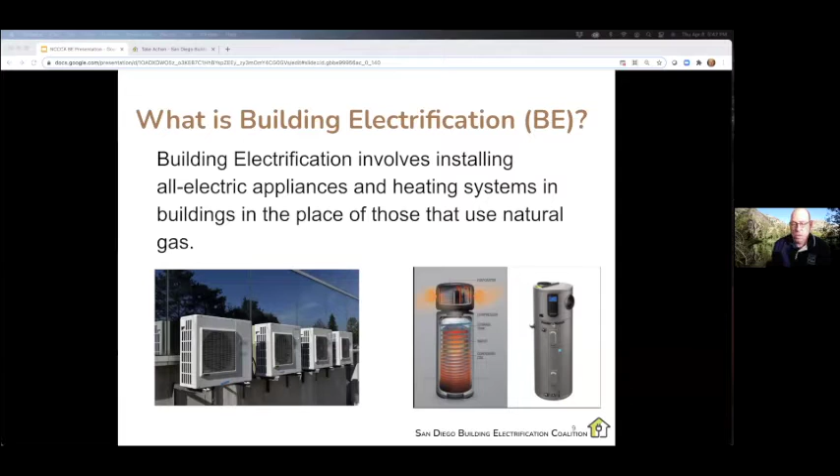I mean, sort of. So the transition is going to require a lot of things, including changes to our building codes so that this transition that needs to happen happens quicker. It applies to all kinds of buildings, so every building can be electrified. And as we've been saying earlier, just want to clarify because a lot of people ask us this, we're just currently advocating for no new gas hookups. So any buildings built from now on, we're hoping to not have any new hookups for gas lines.

So why is it important to electrify our buildings? Well, there's some serious climate benefits and reductions in greenhouse gases by eliminating burning natural gas in buildings and replacing it with energy from renewable resources. Also, local, regional, and state climate targets cannot be met unless we electrify our buildings, and that's really important. And we're going to talk about the many adverse health effects with indoor air pollution that's generated when using natural gas in buildings, mostly residential, and we'll get more to that in this presentation.

There's also lower costs associated with operating and also building all-electric buildings. Also, all-electric appliances are much more efficient than natural gas ones, and again, we'll go into that. And finally, there are some serious public safety risks associated with the extraction, transportation, storage, and delivery of natural gas. A couple examples. We live in earthquake country, so when you have an earthquake, there's a high potential for these gas lines to rupture and have post-earthquake fires, which has happened in the past.

And then I'm not sure if people are familiar with the Aliso Canyon gas leak, where there's this massive storage facility in Aliso Canyon that was leaking tons and tons of natural gas into the atmosphere. That was really bad for the residents. They had to be evacuated, and also it compounded the climate change issues with natural gas, the millions of tons going into the atmosphere. So when we don't need natural gas, these sort of things will stop happening.

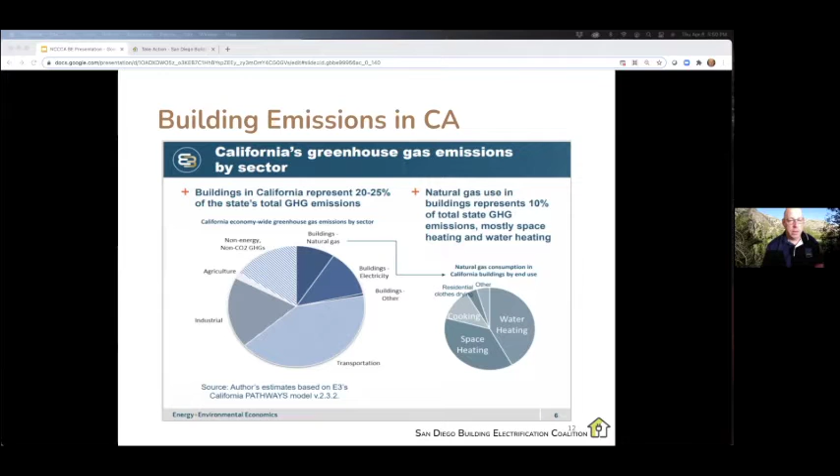There's lots of advocacy trying to influence the current building code cycle, the 2022 cycle, to make that an all-electric code. And then also there's utilities like Sacramento's SMUD that are really pro electrification of buildings, and they are promoting pilot programs and incentives to electrify buildings.

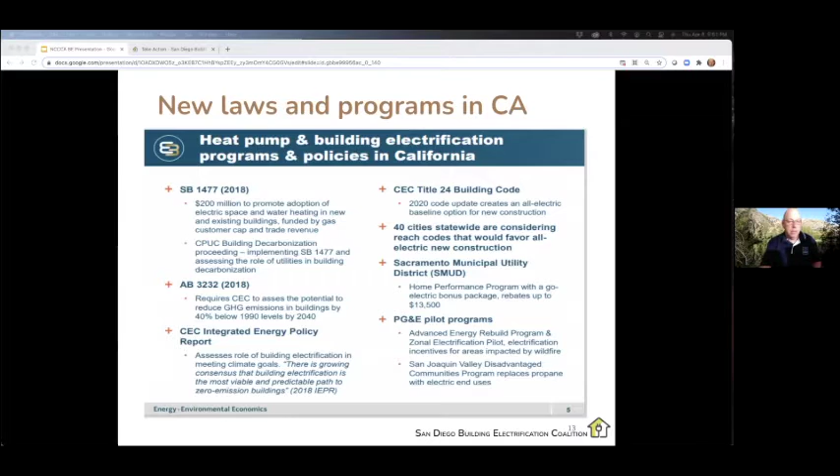There are currently over 40 municipalities that have already adopted some sort of building electrification code, whether it's an all-out ban or something close to it with a few exceptions. So Berkeley is an example of an all-out ban. All single-family, high-rise, multifamily, and non-residential new construction is required to be all electric. Then you've got cities like Brisbane and Burlingame, which are all electric. However, they have some exceptions for cooktops, or if you're life science or restaurants, those businesses are not affected at this time.

So, like I said, there's over 40 of these. So there's lots and lots of momentum going towards electrification. So now I'm going to expand a little bit on why all electric buildings have lower costs.

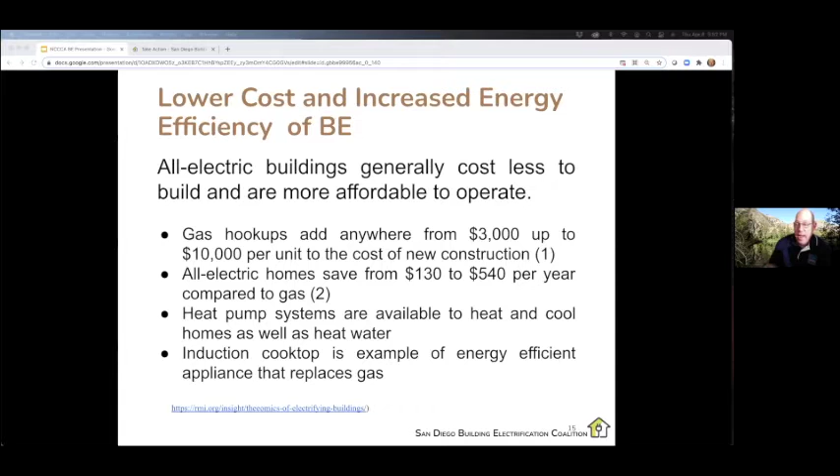So first costs for new constructions: buildings can cost anywhere from $3,000 to $10,000 less per unit due to not having to install that infrastructure for gas. Operational costs also are considerably lower. For instance, utility bills can be anywhere from $100 to $500 lower compared to using appliances that use gas. And then this technology is fully mature and readily available. Heat pump systems for both water heating and space heating exist, and they're comparable in cost. And Carl's going to really dive into that later on, so he can really explain why that is.

Again, a little more detail. The reason why new construction costs less is that you don't have to install pipes from the main into your building and throughout the building. It just doesn't have to happen, so it's much cheaper. And also, heat pump systems are anywhere from 3 to 5 times more efficient than electric resistance. And then when you pair this with rooftop solar and storage, the cost will fall even further because your cost for those electrons is less, and also the emissions are less because those are all coming from renewable sources. Again, we'll elaborate on that more.

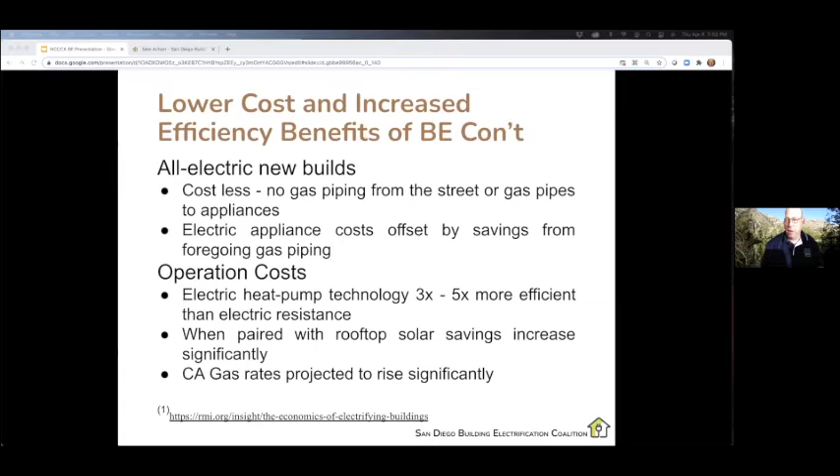And then what's going to happen is that as more and more people transition to electrifying their buildings, the infrastructure for gas needs to be maintained and upgraded. And so there'll be fewer and fewer ratepayers that rely on gas, and so their costs are going to go up. So it definitely behooves the average person to electrify soon, because that is a reality that's going to happen. And lastly, California is not quite as green as we think.

There's a lot of things that California is leading on. But for example, the state of California continues to issue fracking permits, even though it touts its emission targets and so forth. They're still issuing rebates for gas water heaters, which will not help them reach these targets. So they're kind of fighting each other on that.

And then lastly, like I said, there's lots of advocacy for all electric building codes in the Title 24 update cycle. However, from what we're hearing, that's probably not going to happen. What we're truly hoping is that they mandate either heat pump water heaters or heat pumps for space heating. But we'll wait and see. But there's lots and lots of people trying to make that happen.

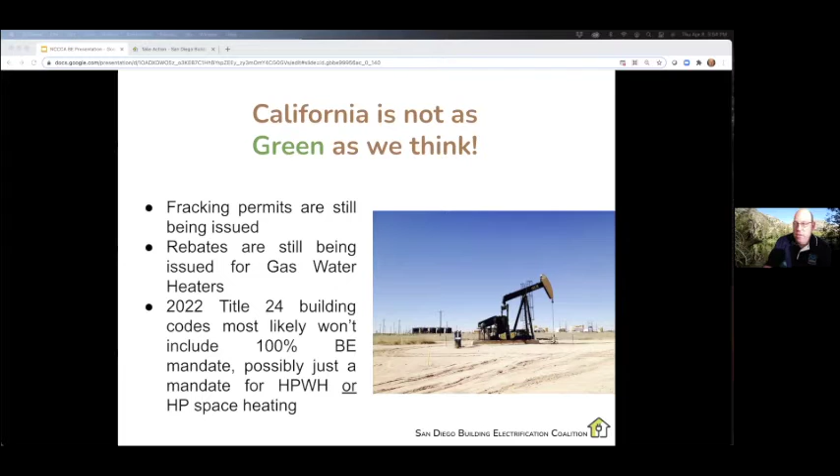So because of this, we potentially may not have an all electric building code until 2025, which unfortunately may be too late. So this is why we need to advocate for building electrification at every level now. We can't wait for the state to do the right thing. We need to mandate it here locally and start that transition as soon as possible. So like I showed you, it's already happening. So that's what we're trying to do at the SDBEC, really trying to get the localities to consider all electric codes. And there's definitely cities around San Diego County that are doing that. So that's great. So that's what I have for BE.

I'm going to now start transitioning into the adverse health effects of indoor air pollution, another really good reason why we need to electrify our buildings. So in the spring of 2020, 2 new reports were released. They are both studies researching the health effects of gas in built spaces. The first report is a meta-study out of UCLA Fielding School of Public Health, and examined both indoor and outdoor air pollution in California caused by residential gas appliances, including furnaces, water heaters, and stoves.

The second one was also a study about health and gas, but this time it was more focused on cooking. Both those studies provide tangible, shareable information complete with citations, many of which are hyperlinked from the report. We go into some key takeaways here about the toxins that they tracked and their effect on health. But let's first ask a question. What percentage of households in California have at least one gas appliance? Is it 37? Is it 68? 90%? 68.

90. It's kind of scary. 90%. Yeah, so that means that California and San Diego have a lot of work ahead of us to decarbonize our homes. So that's phase 2: what do we do with the existing building stock?

So you probably remember being told that natural gas is clean to burn with no emissions to consider. That simply isn't the case, and no one in the industry has ever found that to be true. That's why there's mandatory venting for gas appliances; it's the norm, it's the law. But vents only work if we use them and operate them. So if we forget to turn them on, those toxins potentially can hurt you. And less than 35% of Californians turn on the ventilation hoods when they operate their stoves. And in some cases, there's no hood present, so that's not even an option.

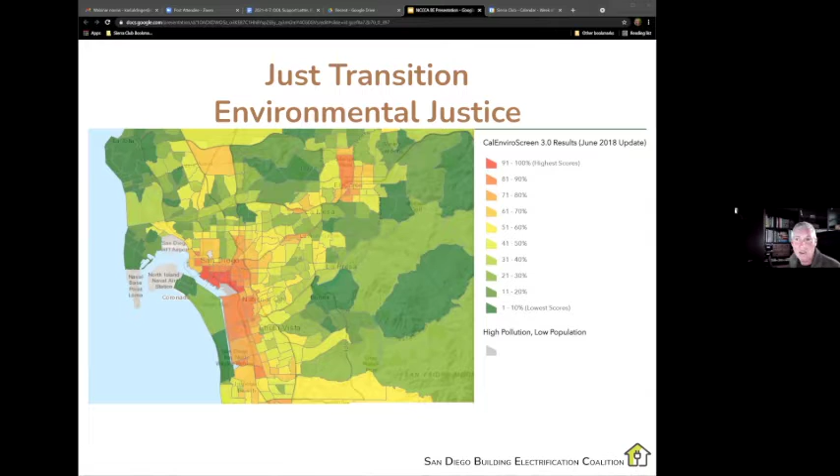So one important step in moving forward with building electrification is to ensure that we address the communities that need to have their air cleaned up the most. Often when we're doing this work, we remind people those are the folks that should be addressed first. Whether that means incentive programs or subsidies, there's got to be ways to help these communities that have the worst air quality, not just in San Diego, but we know San Diego has some of the worst air quality in the country. So there's a lot of work to do. We also have EJ communities in North County San Diego, in Oceanside, Vista, San Marcos, and Escondido.

We talked earlier about gas cooking and the importance of ventilation. One factor for people who rent apartments or live in smaller living spaces is that the toxins in their homes are more concentrated relative to that smaller space. So gas combustion toxins in those small spaces are worse for a family's health.

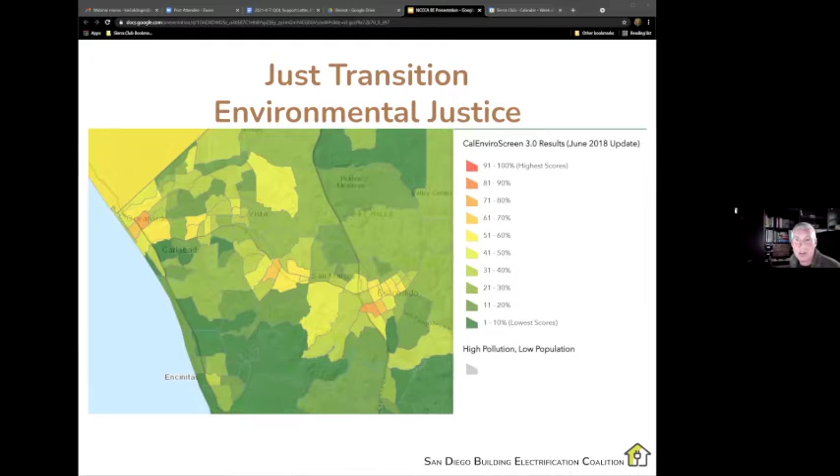I want to talk now about the workforce, because going into this campaign for building electrification, we knew that people's jobs would be affected. I work with IBEW and other labor organizations and policy folks in my climate and justice work in the county. So full disclosure, I really appreciate that we're all part of this community together. I want you to imagine picking up the newspaper one day, or reading the news on a website, and realizing that not only the company you work for or the plant you work in, but your whole industry is about to shrink, maybe out of existence.

I'm going to read you a quote.

"We have the Diablo Canyon nuclear plant. It's right there on a fault line. There's a tremendous amount of concern about that. There's no way, with what we know today, that we would build that plant as we built it. And people are rightly concerned about it. You're in a state where you have three faults that are well overdue for major seismic activity, for a major earthquake. So this is an obvious and pointed concern."

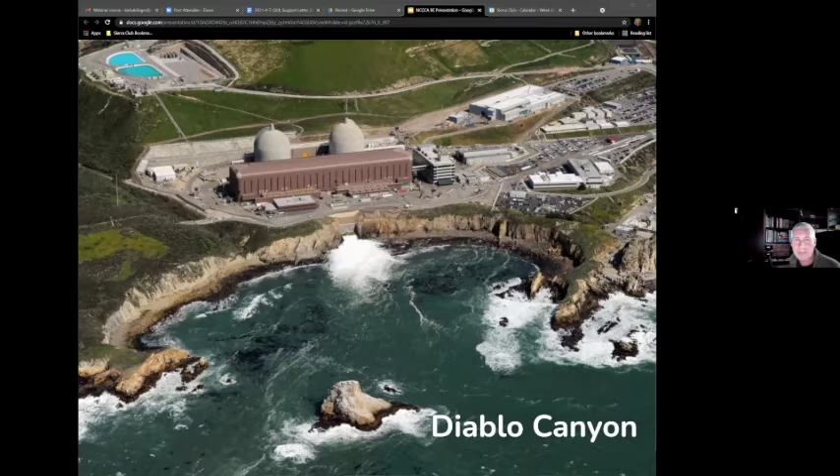The International Brotherhood of Electrical Workers, the IBEW Local 1245, union workers, they resisted the plant's closure. They wanted to keep their jobs, many of which were very specific to the work that they did, but that wouldn't be available locally if this plant were to shut down. You don't get another job at a nuclear plant in San Luis Obispo when Diablo Canyon shuts down. And in fact, you don't get another job at another nuclear plant anywhere in the state of California, because this is the last one that's operating.

So they appealed to state energy regulators. They appealed to the public, and they appealed to state legislators. And this is a photo of the IBEW members and supporters who traveled from San Luis Obispo up to Sacramento to plead their point.

Friends of the Earth and Mothers for Peace, both of which had fought the nuclear power plant for decades, showed up in force to help make sure the closure finally happened. Friends of the Earth, which is now an international organization, was founded on the campaign to block Diablo Canyon. So this was not just another environmental issue for them. This was the issue that got them started in the first place.

But PG&E, environmental groups, labor, and other local area stakeholders all worked to come up with a transition plan, including funds to help buffer the projected economic losses that the community would suffer from a shift in the tax base. In June of 2016, they announced that they had negotiated an agreement to shut down by 2025 with plans to help workers with an additional 25% retention bonus to prepare for job loss.

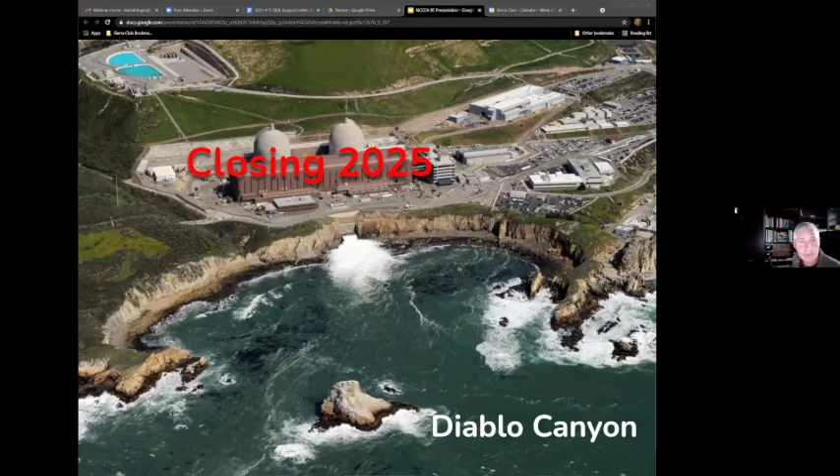There's a footnote here to this story. In 2018, the CPUC tried to slash the workers' retention bonus from 25% down to 15% and undo some of the other tenets that the joint proposal agreement had made. The IBEW was forced to lobby state legislators to restore the agreement with Senate Bill 1090.

And in the end, this is an important story of the community working together to find common ground and respect each other. But I want to point out that it's also a reminder of the importance of organized labor to help ensure workers' rights and protections.

It's really easy for us to look at things from the perspective of an environmental group, to say those workers have to stand down because they're hurting our environment. But it's also really important to think of things from their perspective and know that we have to keep those people whole and make sure that they have a future so that they're not our lead opposition to something that we know needs to change.

Another footnote, this one's more recent. PG&E has not yet followed through with plans to replace the 9% of California energy lost by the decommissioning of Diablo Canyon with fully renewable replacement energy. So recently, the Union of Concerned Scientists in a special report warned that unless someone intervenes, emissions may go up because of this.

Sierra Club and the Center for Energy Efficiency and Renewable Technologies warned in a recent op-ed that because gas power plants operate in communities of color, those EJ communities may once again be impacted the most. So again, this is about acknowledging and recognizing the problems we have with our system and being really thoughtful for how our solutions play out.

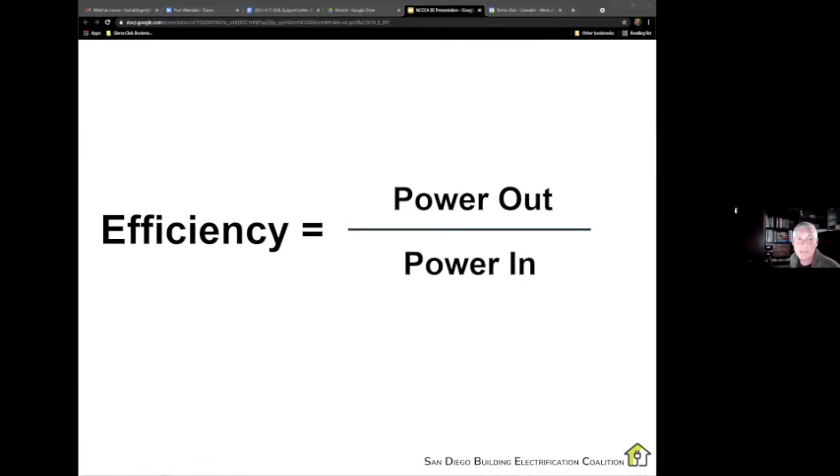And I should point out that efficiency can also represent energy out over energy in or work out over work in. Basically, it's a formula and a term that quantifies a lack of waste. So we just described something as 89% efficient, for example. And that last 11% that would take us up to 100, that's lost to waste. And I'll say it here and now so that I can make myself a liar in a couple of slides. You cannot exceed 100% efficiency. 100% efficiency means that you have no waste or losses, a perfect machine, but you can't exceed it. 100% is the best you could do.

So why do we care about efficiency? Because using fossil fuels has gotten us into a bad place, yet our society has become very dependent on powered things, often to keep us warm or help cook our food. And as we decarbonize and use electricity for all of our heating and cooking, for example, it's important that we don't get lazy and waste electricity unnecessarily. Our challenge to power everything with renewable energy is huge, but necessary.

And by asking everyone to electrify, it's our responsibility never to lose sight of efficiency. Before we go on to the next slide, I want to remind myself and my friends that know me from this community, I've gotten really into cycling and e-bikes and active transportation, and efficiency is key among all things that we're doing in adapting to climate crisis. So remember that if you're shopping for an electric car, find the most efficient one. It's important. All right, moving on.

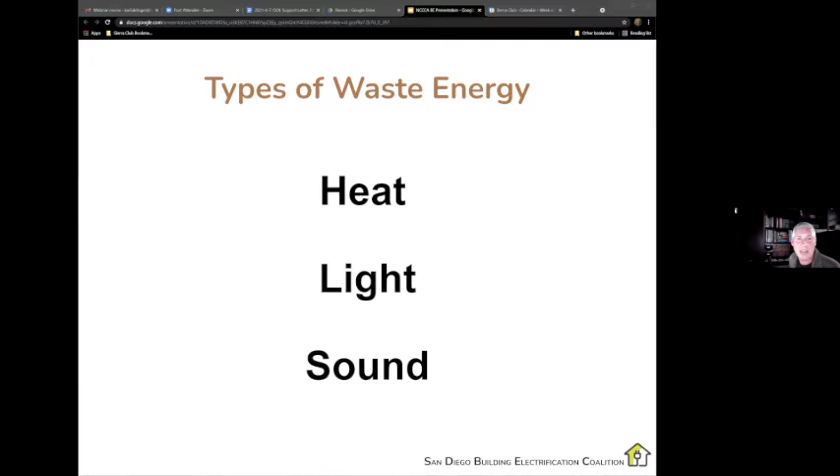But I can give you an example of a noisy machine that's giving up some amount of energy to produce those sound waves. All other things being equal, a quieter machine is often more efficient than a very noisy machine. Here's my example. Those deafening Vitamix blenders at Jamba Juice that were so loud that they had to build sound chambers for them. And they still cause hearing loss in a generation of Jamba workers. That's waste energy. When it's making this tremendous amount of noise, it's putting off a lot of energy to create that noise, and it's not putting it into grinding up your smoothie.

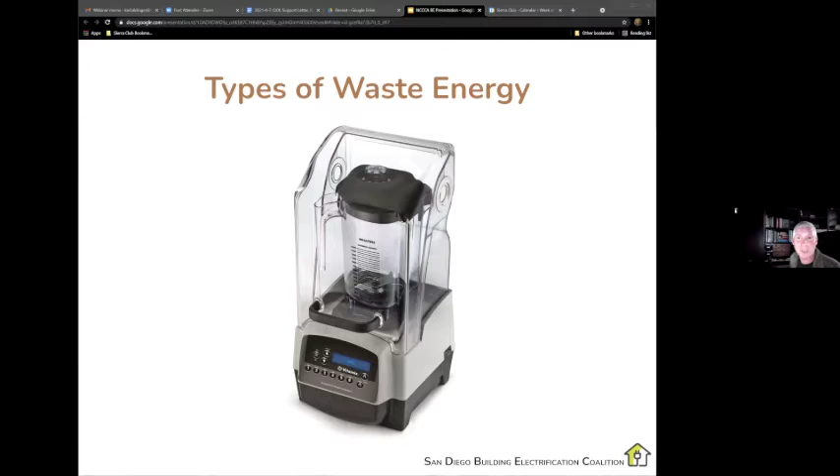All right, let's dive into water heaters. Traditionally, electric water heaters use a pair of resistive heat coils to heat the water. With the old standard called energy factor, you could effectively understand this type of water heater to be 90 to 95% efficient. Most of the energy went right into heating the water, and very little of it was lost to the ambient space around the water heater. If you throw an insulating jacket on it, you could increase the efficiency even more. But try as you might, you can't exceed an energy factor of 1 or 100% efficiency for this type of water heating. Remember, that's a rule. No exceeding 100% efficiency.

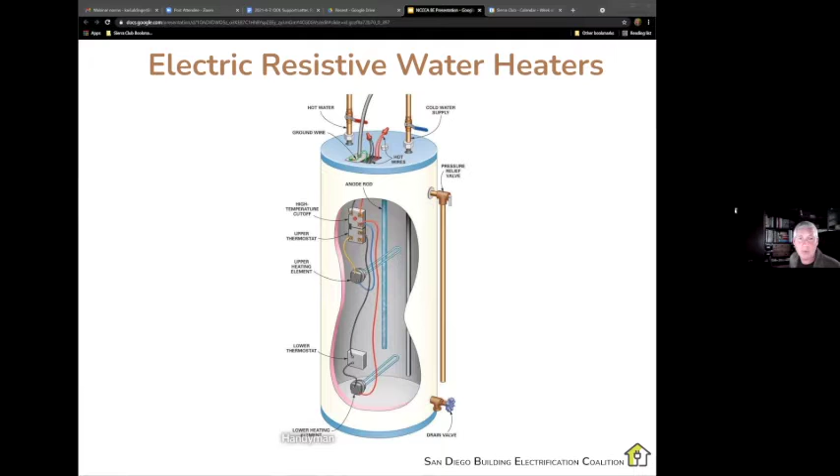But some rules were meant to be broken. Enter the heat pump electric water heater, or more accurately, the hybrid heat pump water heater. On top of this rebellious machine, there sits a miniature compressor, and the system also has an evaporator and a condenser. The trick here is that it takes the ambient heat present in the air, and through a process of controlled compression and expansion of the refrigerant, it's able to transfer heat into the water at 3 to 4 times the efficiency of a standard electric water heater.

This is game changing. But it does require some air exchange to keep finding residual heat in the air. It blows out cool air as if it was a standing air conditioner, redirecting that heat it extracted into the water tank. Now, if I say 370% efficiency in a heat pump water heater, that's technically against the law of physics, but that's not really what's happening here. Instead, it's cheating because you're borrowing energy from a different system, the surrounding air. Even on a cold, chilly day, it works. There is always heat energy in the air everywhere, except the cold void of space.

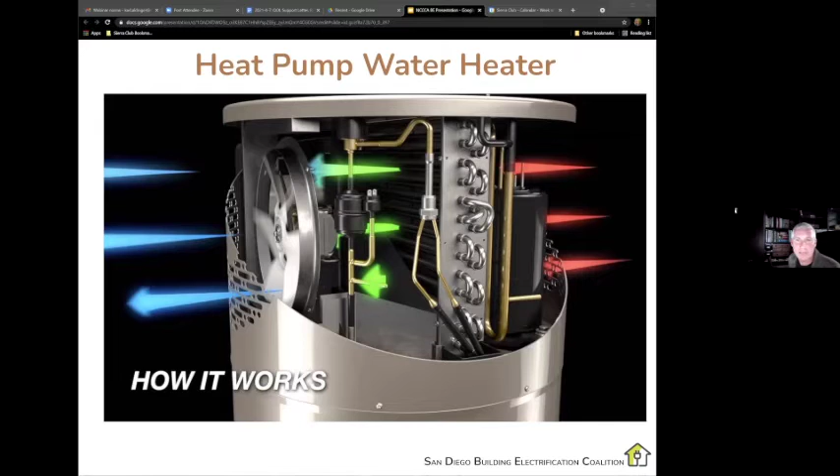All right, moving on to a ducted air conditioner. To discuss air-source heat pumps, it helps us start with the familiar. A central ducted air conditioning system has 2 big parts, the compressor condenser and the air handler evaporator that will typically go in the attic space along with the ducting.

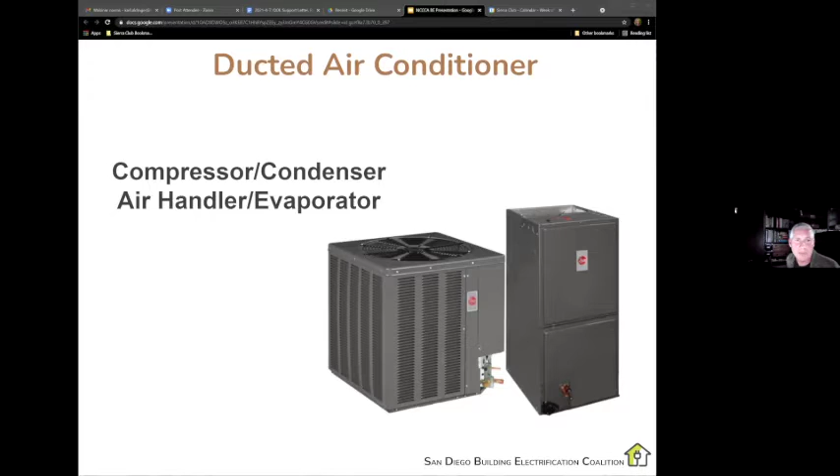Pretty much the only thing that differentiates a heat pump from a single purpose air conditioner is that there's a reversing switch that sends the pressurized refrigerant in the other direction. So this is why there isn't that much difference in price between a large traditional ducted air conditioning unit and then using a heat pump instead. Most times you can't tell the difference when you're standing next to one.

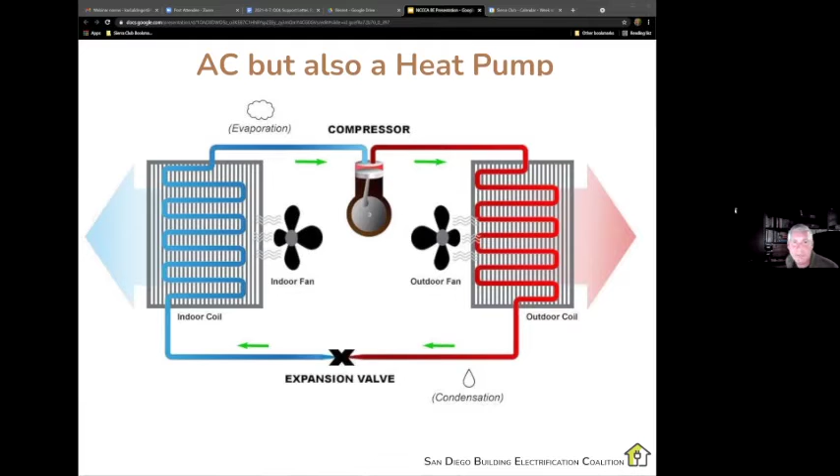Now I need to tell you what is crude and old tech about the traditional ACs or the heat pumps that we see along the side of most of the houses around here. It is sized for the worst case scenario, hot or cold, and it runs at 100% when it switches on. The AC compressor motor runs at a single speed, and it's determined by the 60 hertz waveform that we have from the grid's AC current. That results in an oversized energy hog that uses excessive energy to start up and blows as cold as it possibly can or as hot as it possibly can every time it switches on.

It's the equivalent of having a car with an oversized V8 engine, and all you have is an ignition switch for your speed control. There's no foot pedal, there's no throttle. It's just on or it's off. And when it's on, man, it's on, 100 miles per hour. So dual speed compressors are a good improvement over a single speed. They help a little bit, but it's still a bit of a half measure compared to what I'm going to cover next.

All right, now enter something called the mini split. This technology is used worldwide, and it has been for decades. So even though it may look foreign to you, and you may have only seen a few of them in your lifetime and wondered, why does that one look different? Please rest assured, this is the technology everyone outside the United States is using. It uses all the same principles of the heat pump that we saw earlier. And it's reversible and exchanges refrigerant via copper lines.

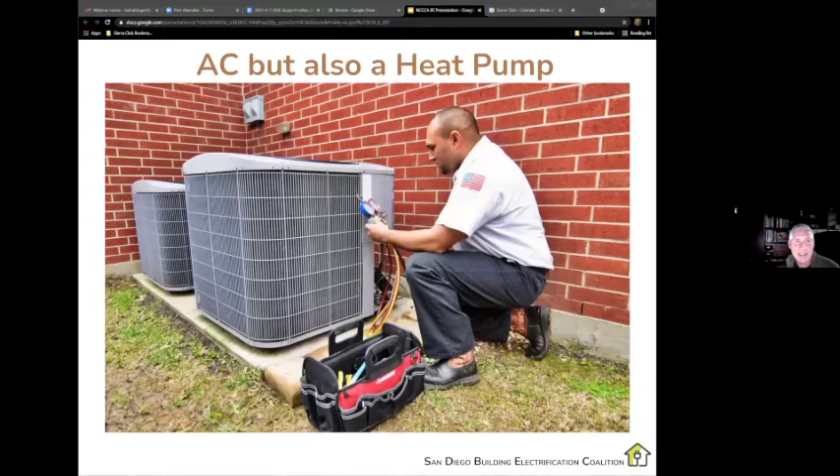So over a 20-second period, it might be engaged for 5 seconds and then off for 15 seconds. Okay, so that would be using it at 20%, 25% capacity. And then maybe when you first powered it on in the morning and you really needed that heat fast, it might work all 20 seconds continuously. The variable capacity, these additional control methods, which are like a precise throttle pedal, to return to that analogy that I had of driving a car, that gives the modern scroll compressor versatility and allows a much smaller motor to run continuously, but using much, much less power over a longer time.

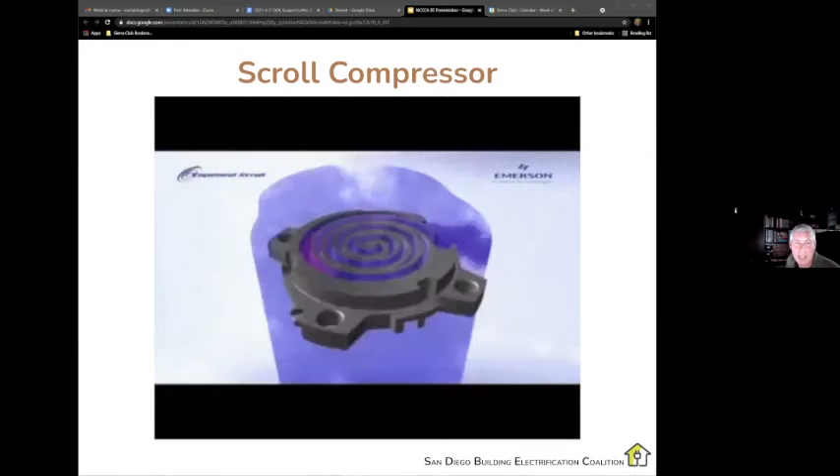So this type of heat pump doesn't switch on with the ground shaking force of a jet engine, which, by the way, is the period of time when a traditional AC or a heat pump that's single speed, they really use excessive power when they first turn on. So the idea that they cycle on for 10 minutes and then off for 10 minutes and then back on for 10 minutes with the traditional ones, that's really part of your efficiency loss.

So the fans for both the indoor and the outdoor parts of a split system are usually DC fans, and they can run at different speeds. So if this thing's at full clip because you need the most out of it, it'll really churn those fans up. But once it reaches a steady state and you've got your space conditioned to where you want it, it will continue to run with slower fan speeds and thus also lower power needs.

Another change with the so-called split system is that the indoor air handler doesn't rely on any ducting. So instead, the air exchange happens in the room that's being affected. So why is that important?

Well, it's important because the ducting is a major efficiency loss in a traditional house system, sometimes costing up to 30% of efficiency loss in the most extreme conditions. So on a really, really hot day or a really, really cold day in a cold climate, all that ducting where your air is leaving the room, going back into the return, getting back to that air handler, and then heading back to you with what is either supposed to be the hot or the cold air, it's all being affected by your attic's temperature, which generally is not conditioned the same way that the rest of your home is.

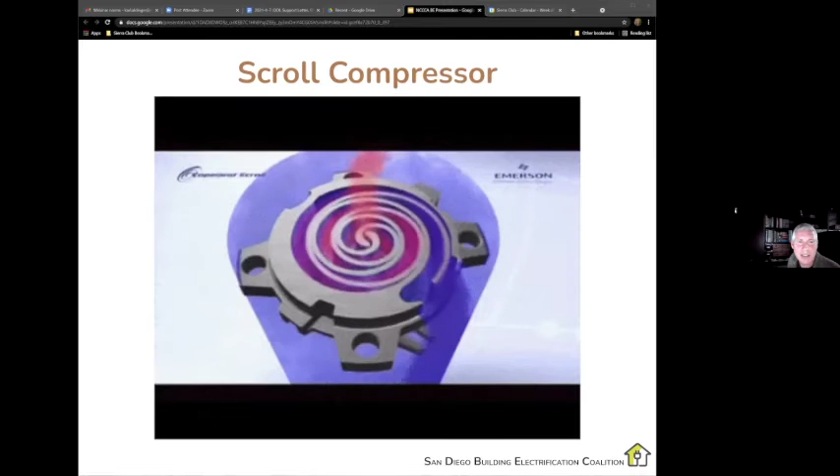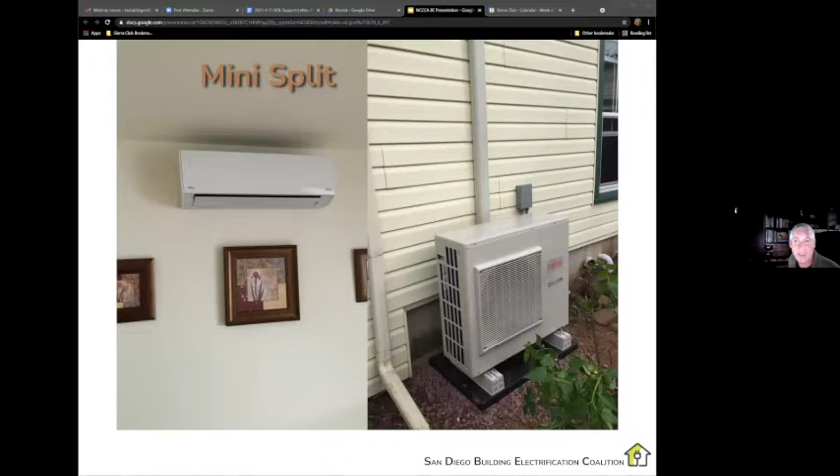Right, for larger homes, what I showed you here, this is called a mini split because when you purchase something like this, it will work well for a bungalow or a cottage because you get one outdoor unit and you get one indoor unit. But for a larger home, that's not appropriate. It's like heating an entire large house from a fireplace or a wood stove. It's very challenging. You end up spending all your time huddled up close to that stove if you live in a cold climate. But for larger homes with a heat pump, the solution is called a multi-split.

And what you have there is you still have a unit that's outside, and it may be a double-sized unit, or they may be even two for a very large home. But then inside you have multiple air handlers, and the copper piping moves around all throughout the house. And oftentimes it'll go to a distribution bank where it'll direct the flow just to the room that you're operating.

On the other hand, there might be rooms that you are in that you do want to condition, and you may want to have them at different temperatures. Well, with a multi-split system, you can do that. People can choose the temperatures they want.

There's even really weird situations where you may have strong sun on one side of a house, bearing in a window where you really just can't control it for some reason, and then another part of the house where it's actually cold. And these multi-splits are sophisticated enough that they could move the heat from one part of the house to the other part of the house. That's how they can manipulate that heat through the distribution system.

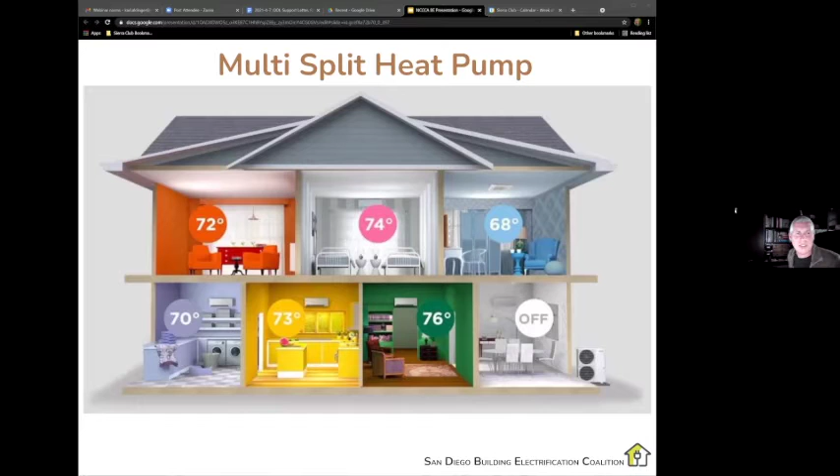Right, the indoor air handlers for split heat pumps can be hung on the wall for easier retrofitting. You saw that earlier. It looks like a kind of a 3.5 foot, 4 foot long tank sitting on the wall. It's not a tank at all, but it kind of looks like that. And that's got all of the evaporator coil in there. It can work as an evaporator or a condenser, depending on which direction you're moving the heat. And it's got electronics and it's got a fan. And it does a good job of oscillating back and forth and distributing the stuff around the room.

But some people are not that enamored with that idea, having this big clunky thing sticking on the wall. Again, it's really good for retrofitting because if you have that existing space already, you can just bore a hole through the wall, run your copper tubing, and then hang this thing on the wall, and you can mount it pretty easily. There's not a lot of disturbance up in your attic and redoing ducting and all that.

But there's another design called the cassette, and I'm going to show you a video of what it looks like when you have kind of a world-class cassette that's capable of really understanding and respecting what you're trying to do in the home. This is pretty high-tech stuff, but it's not unbelievably high-tech. This isn't just for the richest of the rich. This is something that we could put in new construction and would have real good implications on efficiency.

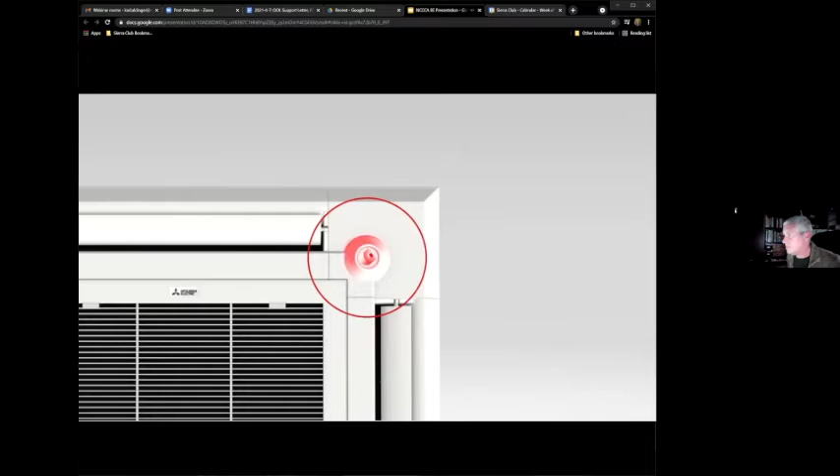Mounted to the exterior panel of the ceiling recessed indoor units, the 3D i-see sensor thermally scans the interior space in a circular motion, continuously analyzing the temperature profile of a room to detect cool and warm spots. To achieve this, the 3D i-see sensor performs 232 circular scans with 8 points per scan to measure 1,856 zones within a given space. The sensor then detects heat signatures based upon size, temperature, and movement to capture an exceptionally accurate thermal profile of the room.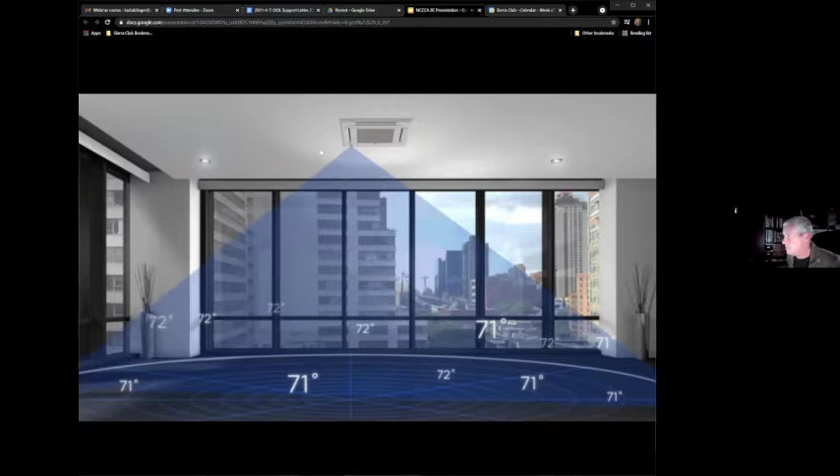By creating a 3D thermal profile, the 3D i-see Sensor can even determine when a space is occupied or completely empty. When the space is occupied, the 3D i-see Sensor identifies the heat signatures and directs the indoor unit to apply cool or warm air as needed. This feature may also be customized to direct the unit to deliver cool or warm air towards the heat signature or away from it, ensuring maximum personalized comfort. When the room is empty, the 3D i-see Sensor will automatically adjust the temperature levels by switching to an energy saving mode based upon user-selected options. Mitsubishi.

So you can imagine how much difference that could make if all the rooms in our new buildings or our new homes, think of a school, for example, a school classroom, we're asked to put stickers on the light switches to remind students and teachers, turn the lights off, right? That's a really good reminder, especially for young people that are still learning about conserving electricity.

But imagine if the HVAC systems in all of our rooms were aware whether there's somebody in the room, and it directed the HVAC to the person in the room. And when the person left the room, it stops doing that. Imagine how much energy we could save if we really paid attention using some better technologies, using the heat pumps that I described here tonight. We could really be looking forward to nice automation that I don't think is too over the top, but that also really respects our limited amount of renewable energy and makes sure that we don't waste any of it.